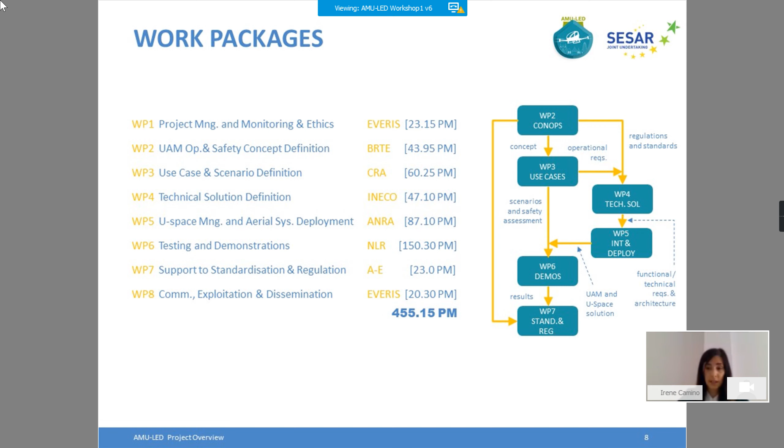Next, work package 4 implements the technical solution so that, along with the U-space architecture, integration and deployment of aerial systems can occur in work package 5. The flight test campaigns are handled then within work package 6, which has the largest effort of all work packages, as you can see. The results, together with the outcomes of work package 2, are then fed to work package 7, which is the support to standardization and regulation. One of the key activities is the dissemination and communication of the advances and findings of the project, which is organized within work package 8.

Moving on to the demonstrations, the flight test campaigns will accumulate more than 100 hours of flights. They are scheduled in 3 different locations and will be managed by different partners. The demonstrations are organized in such a way that the complexity is increasing as they take place.

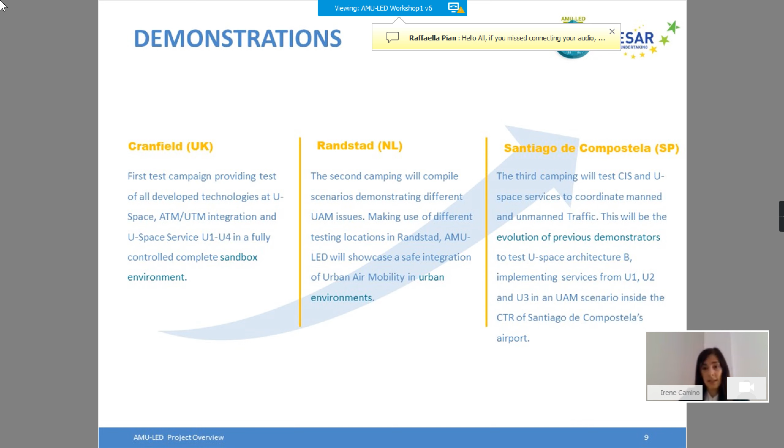The first one, which will be in the UK, in Cranfield, takes place in a fully controlled environment. The one in Randstad in the Netherlands will involve more factors, different UAM issues. And the one in Spain, in Santiago de Compostela, is planned to be performed near the airport, which is therefore more complex. There will be 2 air taxi providers, EHang and Tecnalia, flying the 3 locations, and also autonomous and conventional UAS.

Fixed wings and multicopters are expected to fly too. The 3 demonstrations are scheduled for the summer of 2022.

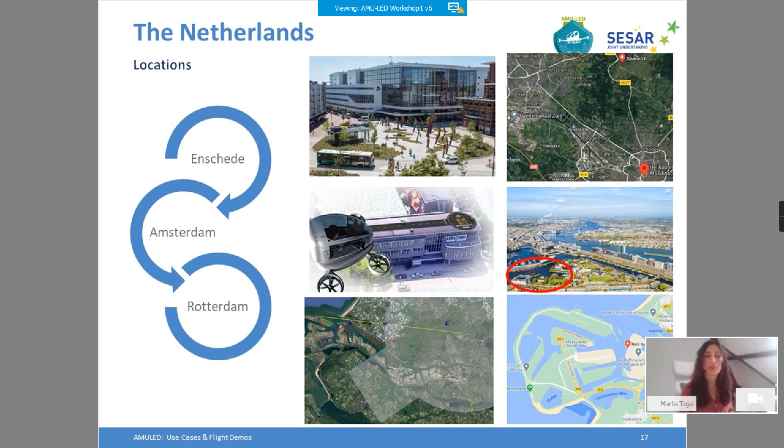The platforms that we're going to fly in the Netherlands are the EHang. We also have some drones from NLR, the autonomous drones from Cranfield, and we will also be flying with the trauma helicopter from ANWB.

So what we're going to demonstrate through these flights and in these sites is safe integration of manned aviation, and we'll also test engagement of drone versus drone, drone versus eVTOL, or drone versus manned aviation, the helicopter for instance. We'll also demonstrate safe prioritization procedures for medical drones, and we will have a test for the operational procedures and mechanisms for having interface with ATC.

We will have the deconfliction between two drones pre-flight and in-flight with U-space services. We will be flying above urban areas and above water, deploying the U1, U2, and U3 services, and we'll be performing the flights in liaison with an air traffic controller from a controlled airport.

And finally, the last demonstration will take place in Santiago de Compostela in Spain. This location is also embedded within the CTR of an airport, the Santiago de Compostela airport, which receives regular flights every day. The location for the demonstration is going to be in a suburban area within the city, so it's probably going to be class Z airspace.

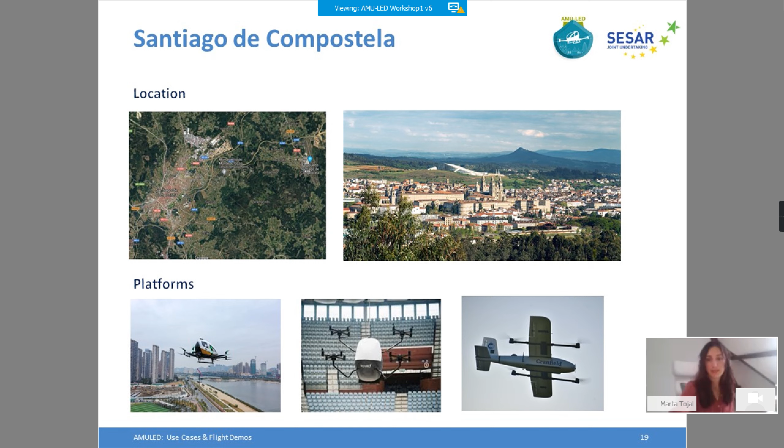So this is the cue for the next presenter. We'll be performing the flights in summer next year, as I said before, and we will be preparing everything in the meantime. So thanks, I will be giving the floor to Alejandro now, who is going to present the CONOPS.

Thank you, Marta. So after these nice introductions to the project and the flight demonstrations, we are about to start our CONOPS discussion. I'm going to do so following the structure or the topics that you can see.

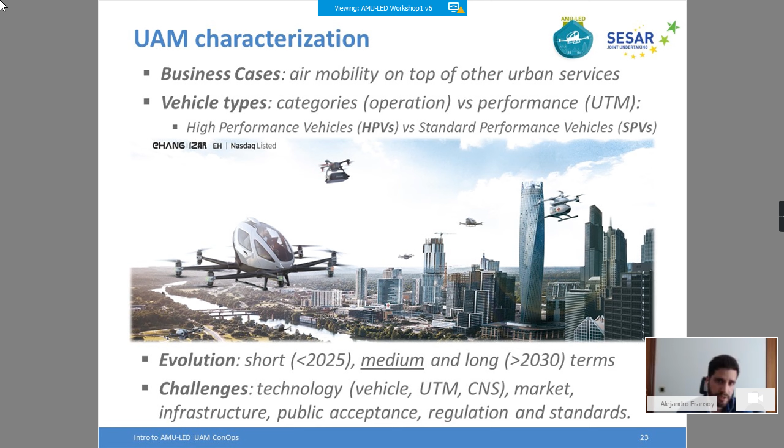Just my last slide. As I commented earlier, we try to respect as much as possible the roles and responsibilities and the services given in U-space regulation, but they obviously need to evolve somehow in order to incorporate urban air mobility. So still, we are proposing the same set of actors, but with extended responsibilities to cope with this traffic.

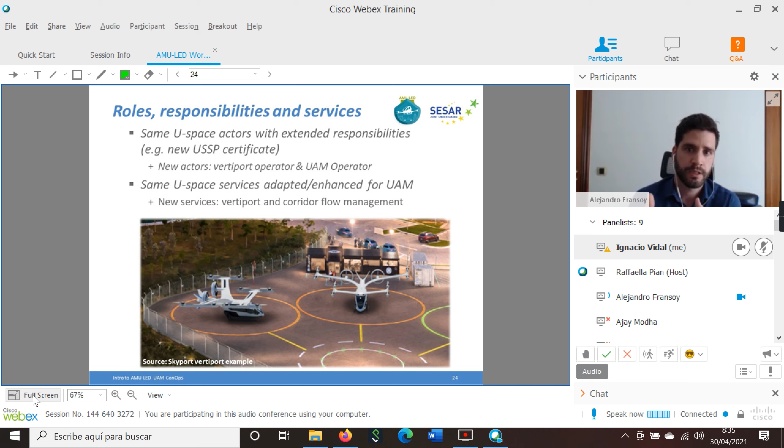So for instance, we can think that U-space service providers might need to obtain a new certificate to manage this high-performance traffic, providing customized services for them, for their operations planning, for their strategic and tactical deconfliction, to access vertiports and manage nominal operations.

Similarly, the Common Information Service, aeronautical information and airspace restrictions have been tailored for these high-performing vehicles, and the same applies to coordination mechanisms with ANSPs.

And even the national supervisory authority should establish a means to certify new UAM operators who will, in the end, hold an AOC, and should develop the acceptable means of compliance for vertiport certification and for granting licenses for pilots in command. So, as you can see, all actors will be affected in one way.

And on top of these changes to the existing actors, there will be new ones, such as the UAM operator itself and also the vertiport operator, who will be in charge of the ground operations, safety and security, boarding, charging or refueling, and more importantly, providing vertiport information, such as availability, to coordinate takeoff and landing procedures with the U-space service provider.

And in the same line of thought, and just to conclude, some services will need also adaptation to cope with this kind of traffic. For instance, I can think of the accuracy, latency, integrity, and the refresh rate of the tracking information could be more demanding, or the conformance monitoring thresholds for activating alerts could be different too.

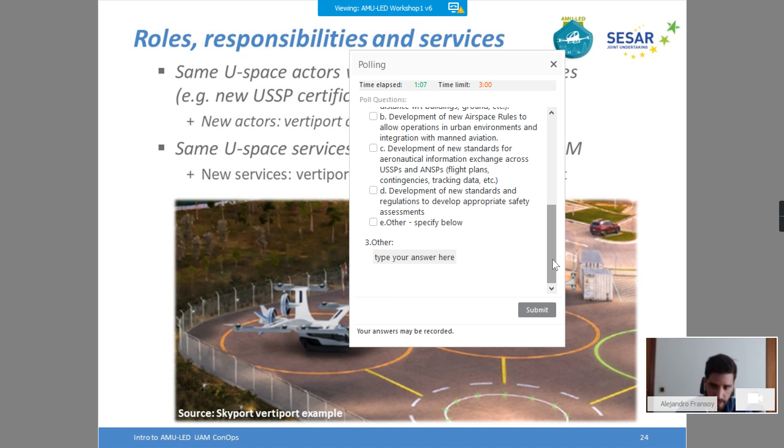I think Rafael is giving you about 3 minutes to complete the survey, and then we can comment on the results. So I'll just be quiet so you guys can read through it.

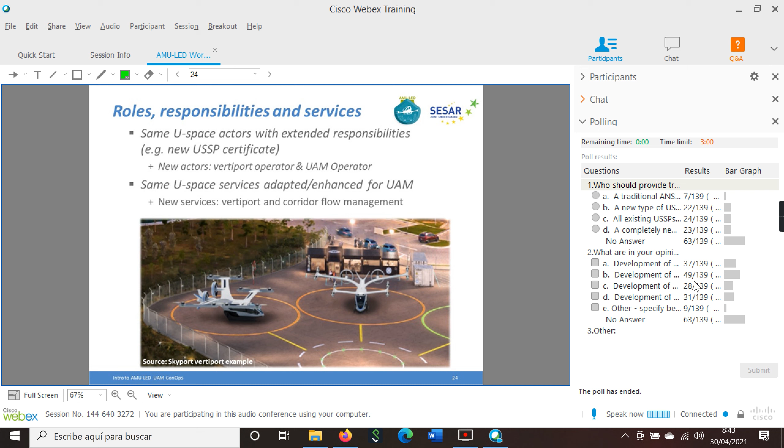Hello, good morning. My name is Victor Gordo, and as Alex has said, I'm going to talk about the proposed airspace structure in the AMU-LED CONOPS on behalf of my company, Ineco, a Spanish engineering company focused on transport infrastructures - railways, roads, airports, and air navigation. I am an aeronautical engineer, I've been working in air navigation for more than 20 years, and in the last 5 years I've been involved in several U-space projects like Terra, Impetus, Domus, and now Dacus and AMU-LED.

Let me show you the airspace structure we have proposed in this project and the reasons for that. First of all, to introduce this airspace structure, we need to know that our main challenge is to provide a safe and effective integration of UAM operations. To do that, we need to be able to provide safe separation and conflict avoidance.

We have three main challenges. The first is the separation of drones with regard to manned aviation, specifically high performance vehicles and VFR aviation. This is because general aviation commonly lacks any kind of transponder or conspicuity means, or not all of them have them - this is a real problem for integration with unmanned vehicles. In general, with manned aviation there are different altitude references: manned aviation has traditionally used barometric altitude, whereas drones use GNSS altitude, and this also difficults the integration of these different traffics.

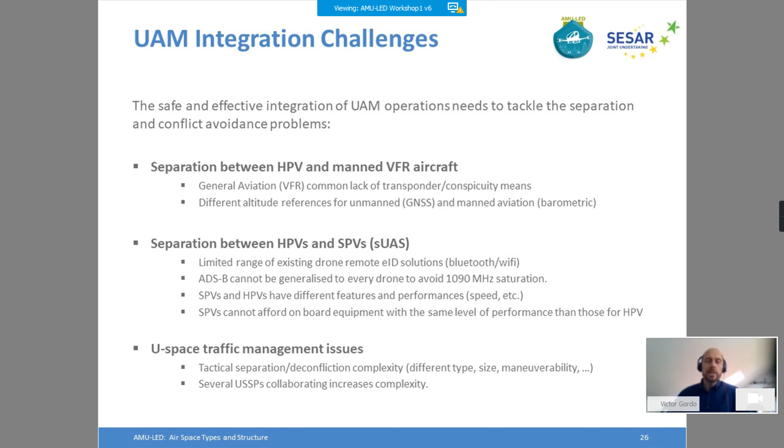In drones, we have different types: fixed wing, multi-rotors, hybrid. We have different sizes, different maneuverability, and drones flying apparently to every place. So the tactical separation is much more complex than in manned aviation. Also, the environment is much more complex, because in traditional aviation we have only one ATM provider in each volume of airspace, and here we are going to have several U-space service providers collaborating, which increases the complexity.

So with all of that in mind, we have proposed an airspace structure which tries to handle all this problem and provide a compromise solution. We can see here on top of the picture above, manned aviation. Then we have two layers: the high performance layer and the standard performance layer, mainly devoted to high performance vehicles and small drones. Let me explain the concept.

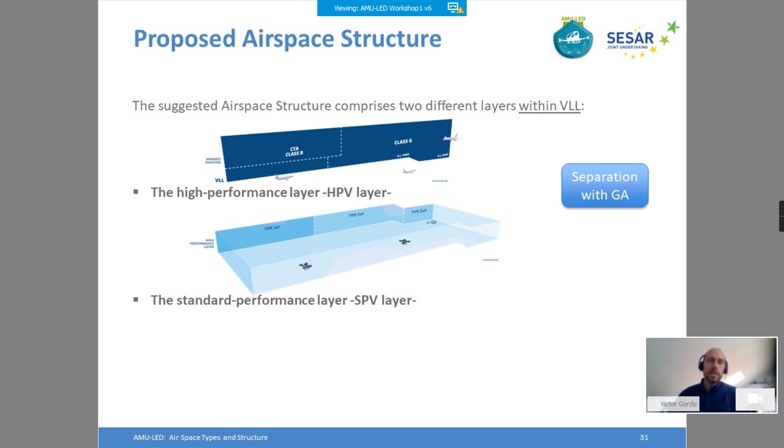As said, the suggested airspace structure has two different layers within very low level. Being within very low level, the high performance vehicle layer will be separated from manned aviation, solving the problem of separation with general aviation without conspicuity, as well as the problems of different altitude references. Then the high performance vehicle layer and the standard performance vehicle layer will provide separation of large drones and air taxis from small drones, which are the most common ones nowadays. This provides separation between these two types of vehicles.

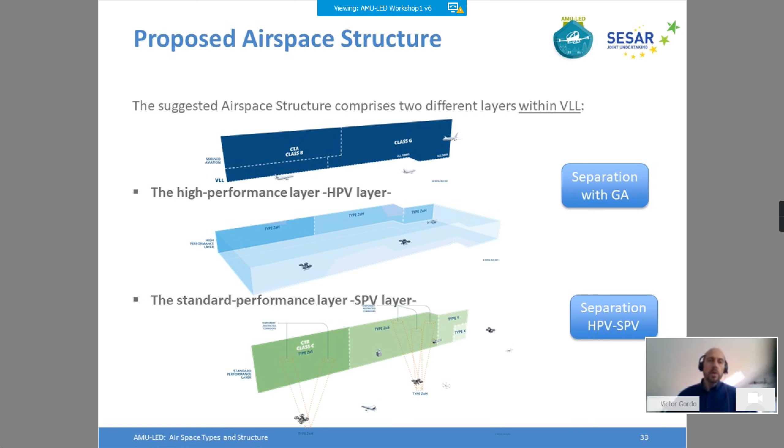We consider that this solution is a feasible way, in the short to mid term, of providing a safe environment of operation for all these kinds of vehicles, without doing very dramatic changes to the current way of proceeding in manned aviation, and also allowing the continuing operation of small drones.

But of course, there is one problem remaining: the high performance vehicle layer is okay when they are in cruise phase, but they have to land and take off. For that, we have considered that vertiports will be located in Type Z airspace volumes. And when a high performance vehicle pretends to take off or land, they will activate some predefined dynamic corridors connecting these vertiports with the high performance layers.

Why is the reason to not have this corridor activated all the time? Well, because otherwise we would be restricting too much airspace for the small drones. So the idea is to use these volumes of airspace, or to protect them, only when required to be protected, not the whole time. This is the idea behind it.

And this way we will assure the separation between the high performance vehicle and standard performance vehicle, even in the standard performance layer on the ground, let's say, where the vertiports will be located.

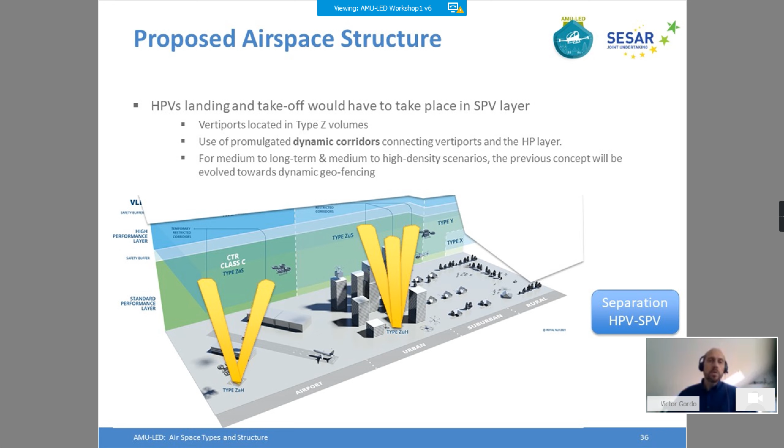So what will be the general way of working of these vertiports? They will be located in U-space airspace, attending to CORUS definition. So when a high performance vehicle wants to take off or land, it will request this operation from the USSP, and the USSP will activate the corridor. The standard performance operation in the corridor will be cancelled, a geofence will be provided, and all vehicles over the area will be required to change their position and go out of this corridor, or land if required.

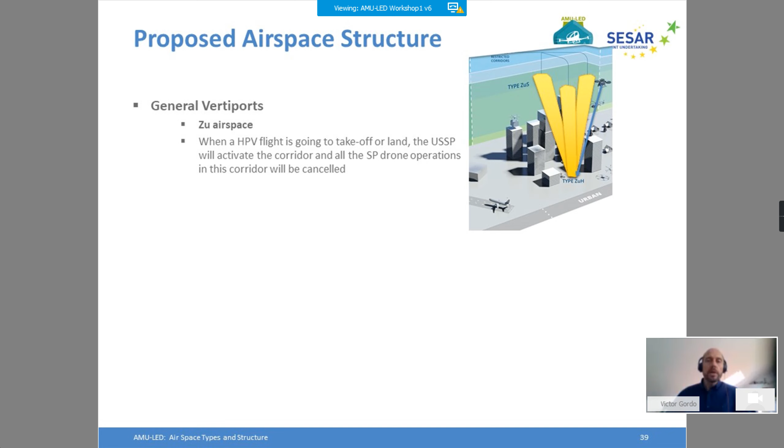But what happens when a corridor is in a CTR? When we have these vertiports in a CTR, we have a different problem: the airspace is Za airspace, again attending to CORUS definition. So in this case, the USSP cannot activate the dynamic corridor by itself. The process will be the following: again, the operator will ask the USSP to activate the corridor to land or take off.

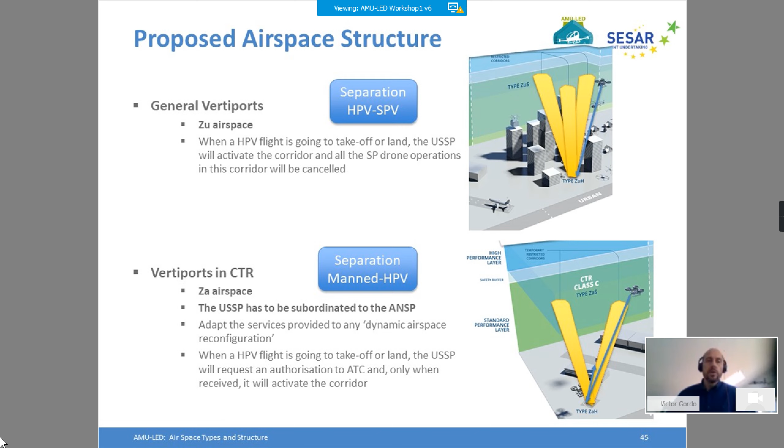Then the USSP will ask for permission, for approval, to the air navigation service provider responsible for that volume of airspace. In case there is a dynamic airspace reconfiguration, they will not allow this activation, or they will allow it if no other manned aircraft is operating at the moment. Then when the airspace is free from manned aviation, the ATM provider will allow the USSP to activate the corridors, and the operation of UAM will take place. And then we assure separation not only of a high performance vehicle from a standard performance vehicle, but also from manned aviation.

The last point I want to mention is what happens with these large air taxis which are thought to fly with a very high flight envelope, higher cruise speed, cruise height, larger speed and range. Of course, they cannot fly at very low level all the time, because they have a greater visual and noise impact, and a higher flight envelope. They have to fly, for example, at 10,000 feet.

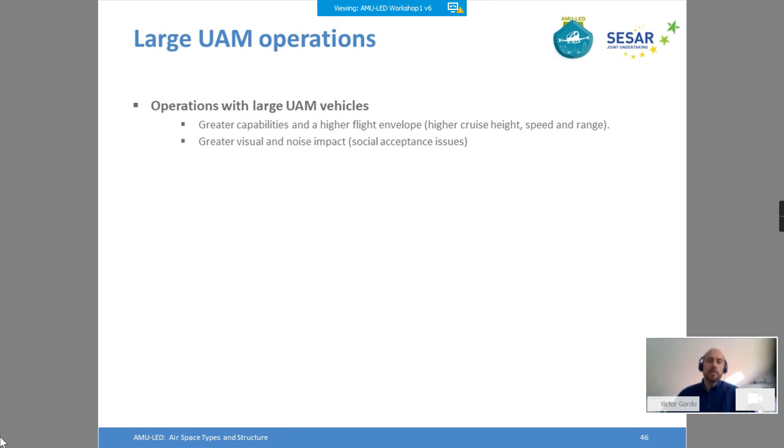What do we plan to do with them? Well, for cruise activities, they will have to fly above very low level. So our idea is, in the short term, to provide a limited number of corridors for this high performance vehicle. But considering that if you are going to fly from the airport to the city, you are not going to jump to 10,000 feet. This happens when you are going to fly from one city to another, or from one place to another, at 100 kilometers at least. If you are going to fly a few kilometers, you don't have to fly to 10,000 feet and then go down again. It doesn't make sense.

So in case you want to fly a larger distance, we can set a number of limited corridors, and the word limited is very important, because if we establish an unlimited number of corridors, in fact what we are penalizing is manned aviation in general, extending very low level to 10,000 feet somehow. In the long term, perhaps with flexible use of airspace, all high performance vehicle and VFR manned aviation can operate in a non-segregated environment, provided that in the long term all VFR flights will be properly equipped and we can assure separation.

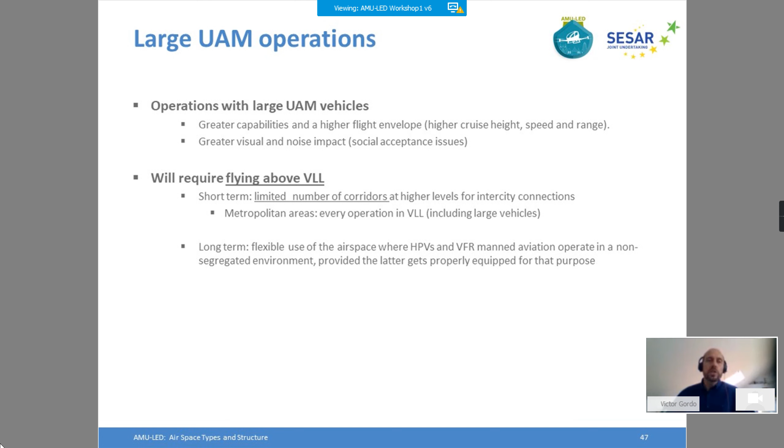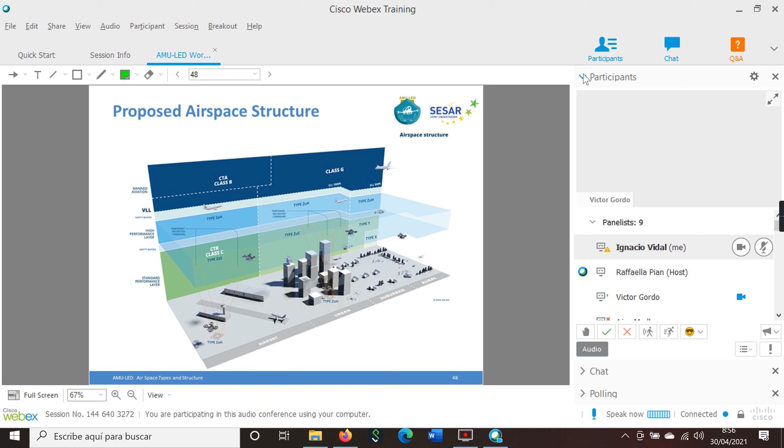So just to end, let me recap. We have three different layers: above VLL, traditional manned aviation; the high performance layer, which will be a type ZuS airspace with high performance vehicles, where manned aviation could enter provided they are equipped with the required onboard equipment, conspicuity means, whatever. And on the ground, a standard performance vehicle layer closer to the ground, where they are not so noisy and can fly closer to the ground at lower height and speed, not interacting with the higher performance vehicle, except at the time they want to take off or land. So we will have, in this case, dynamic corridors around vertiports.

And the last point before closing my intervention is that, of course, we assume that between VLL and manned aviation there will have to be some kind of safety buffer, which is yet to be defined. It's not yet in our concept, but we have to define it. In a lot of states currently, drone operations can only happen up to 400 feet, not 500 feet. So yes, we assume that a safety buffer will be required, and also a small safety buffer between the high performance layer and the standard performance layer.

And well, this is in summary what we have planned for the airspace structure. We know that it is perhaps a challenging airspace structure, but we think that it allows a different way of proceeding without a large impact on manned aviation in the short term.

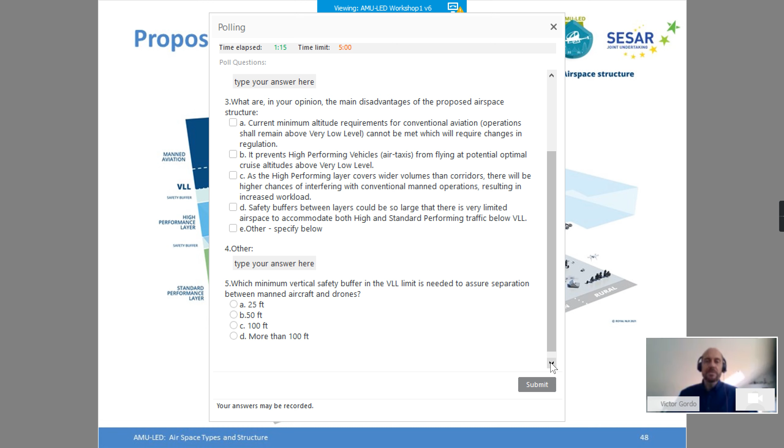So I think the poll is closed, isn't it, Raffaella? Can we see the results? The results are visible in just a few seconds. Thank you. Okay, ready for you. Okay, thank you very much. Very interesting results indeed.

We have 40 people saying that the main advantages of the proposed airspace structure relate to providing separation with manned aviation without requiring any airspace change, and also the dynamic activation of protection volumes around the vertiports, which 35 people consider very interesting.

And also allowing more flexible UAM routes.

With regard to the disadvantages, the most selected option is the problem with safety buffers, which we also consider could be something to address. But also the high performance layers cover wider volumes than corridors, preventing air taxis from their optimal cruise height. Finally, we have different replies regarding the minimum height, but most consider that at least 100 feet will be required, which could be a constraint.

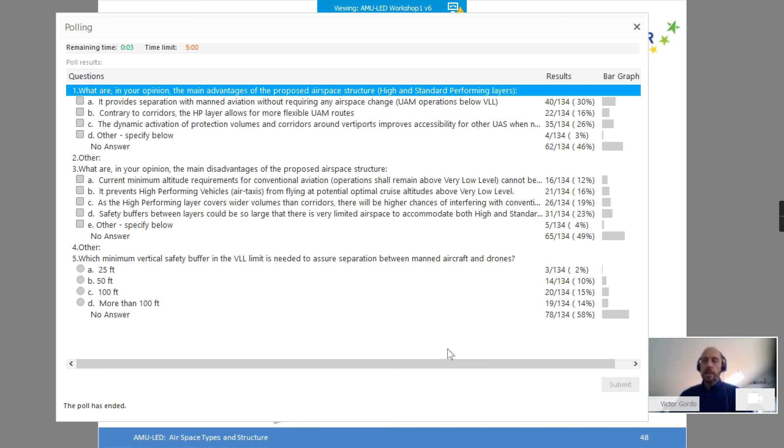Hello Victor, thank you very much. So this is Gokhan Inalhan, BAE Systems Chair, Professor of Autonomous Systems and Artificial Intelligence here at Cranfield University. Specifically, what we're going to touch on today is the separation and conflict management that we envision under the AMU-LED project.

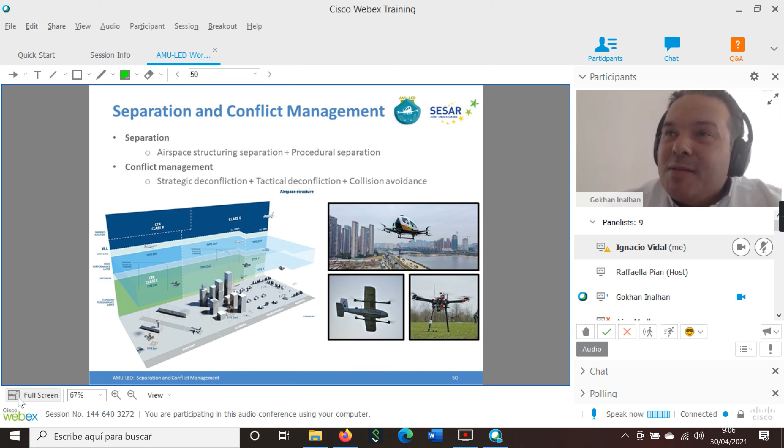This whole composite CSM concept is obviously about separation, and the way we see it is through these layers, whether on the high performance vehicle side or the standard performance vehicle side, and this airspace structuring that we have, including type X, Y, Z, and granularities between Z, leading into procedures for procedural separation. That's what we see as the main separation guideline.

And above that, integrated or interwoven into that, is this notion of conflict management. This conflict management, as you probably all know, happens at different time scales, starting from the strategic level, going into tactical, and then into real-time situations where you move into collision avoidance, whether detect and avoid or see and avoid.

One important aspect is that how you do this and the granularity associated with it is dependent on the types of vehicles. I'll be very open, it's a learning game for us too, because the notion you get out of urban air mobility or advanced air mobility, whether standard performance unmanned air vehicle or higher performance aircraft, which could indeed be autonomous as well, not only manned.

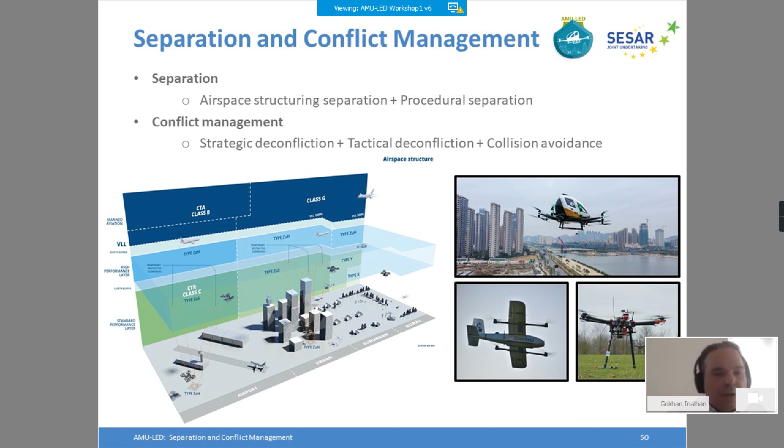And manned does not necessarily mean it's not autonomous, so the level of autonomy is interesting here. It adds different flavors to all of this question, one we cannot answer in its full entirety, but we're taking it slice by slice, piece by piece. So this is the first cut we have towards this.

Moving into it, it's important to identify the actors involved, whether competent authorities, USSPs, the Common Information System and its support, or operators, pilot in command, and in control, and the activities they undertake as part of separation and conflict management. Within this integrated structure, we started with airspace structuring, but we're also looking at operational planning, ground level surveillance, geographical containment, and methods for detect and avoid.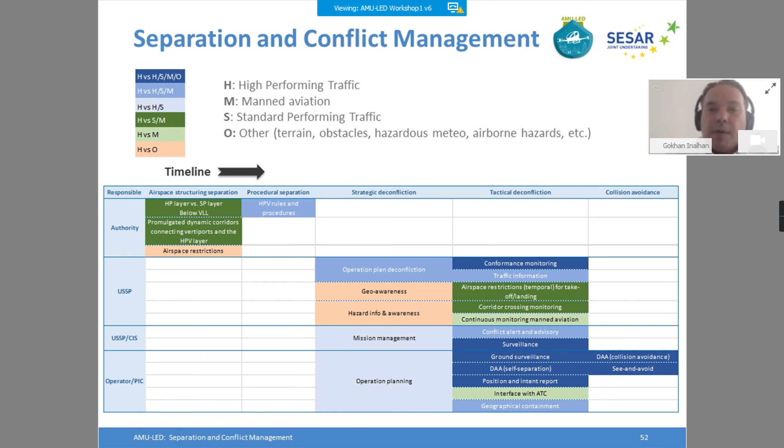The fundamental question becomes, with such a complex scenario, how do you test algorithms? How do you test methods and so on and so forth? This is one of the key challenges, and we were aware of this from day one while preparing the proposal itself, the AMU-LED proposal.

The issue was to sit down and understand both the methodologies, from an airspace structuring level, and also the actual implementation of the procedures, going all the way down to detect and avoid or see and avoid. We would need to test this out and understand it in an exhaustive sense.

This is one of the efforts we are currently focused on: doing this within a simulated environment which can embed both manned flights, unmanned flights, and vertical takeoff and landing vehicles, whether manned or autonomous, embedded into specific simulation scenarios. You're seeing here a highlight of this whole modular structure that we are progressively building within Cranfield University to look at separation and conflict management.

One of the interesting features of this is the inherent capability we're building to do co-simulation and co-testing with live flight tests. So the extra number of vehicles, and extra number of risks from having a large volume of vehicles, is to some degree evaded by having virtual elements within our flight testing scenarios.

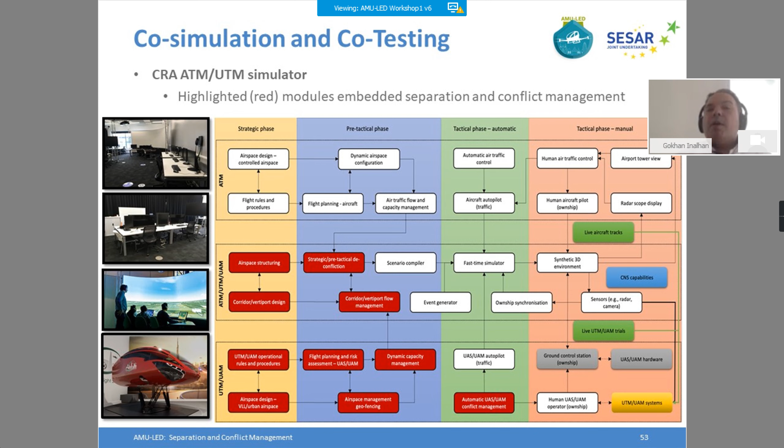Here, of course, the immediate issue that comes in is the nominal cases. You also see the off-nominal cases, but what's happening at the contingency management side - meaning off-nominal cases relate to contingency management - and there's a further level of that, which is emergency management in emergency situations.

What we're getting, especially with regards to these urban environments, including unmanned and manned air vehicles, some of which might have autonomous or semi-autonomous features, is different notions of failures. These could be standard CNS failures, or environmental effects from operating with aerodynamic blanketing effects, the effects from skyscrapers and other buildings, adverse weather effects which can be local phenomena, and electromagnetic interferences.

These could be distributed across the whole urban operations you might have. We could also have human and operational events, including pilot in command distractions, medical issues, and real-time obstacle collisions that might happen. You might see all of these appearing because of new construction - a new crane comes into the scenario and it changes things.

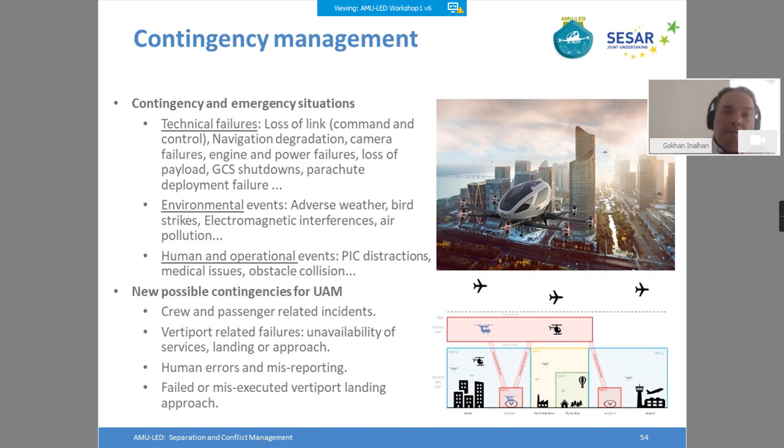One of the things you see is this emergency landing situation, where you're looking at it both at a strategic time frame, a tactical time frame, and a real-time time frame - identifying locations to land: predetermined, not available, or real-time determined, updating your geographical information systems, and so on. It's part of a whole cycle of events you're seeing here.

We see this as a very key enabling method in both social acceptability and as part of safe operations, as a case of safety cases, to be able to do these types of things.

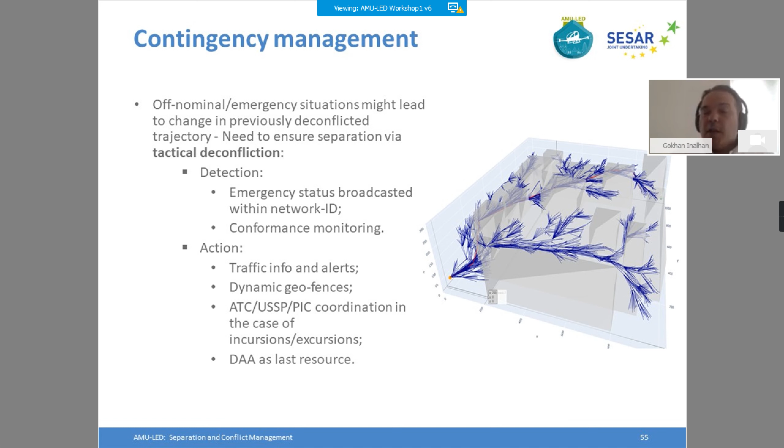And we are working towards implementing these within both simulation first, and then to be able to do it in the first flight test as a part of the technology development aspects. Which takes us into various research themes and the idea. Within AMU-LED, a very large demonstration project, at the end of the day, success is driven by the need to sit down and demonstrate these capabilities, the basic fundamental ideas that we're developing.

But there are also key aspects that come from the structuring of the business. Having multiple USSPs on the same airspace, how do we do capacity management? Do we do it in a centralized or decentralized fashion? Once that comes in, how are the SCM duties distributed, where you have multiple operators and multiple USSPs at the same time? We're looking at different methods and approaches, especially AI-driven methodologies, to handle different architectural schemes, whether centralized or decentralized, for dynamic capacity management and SCM.

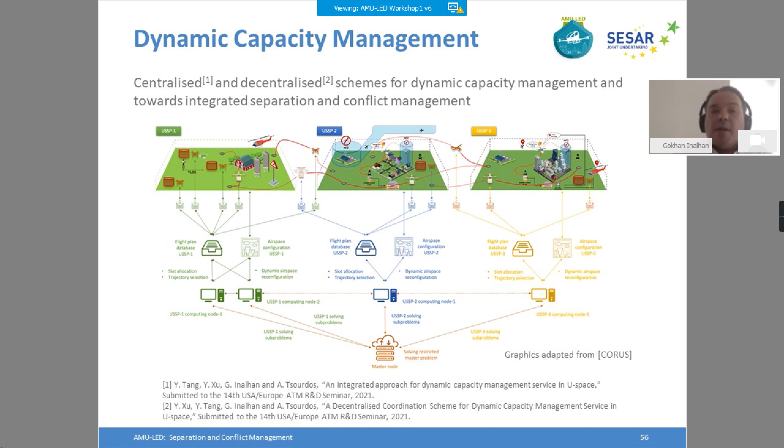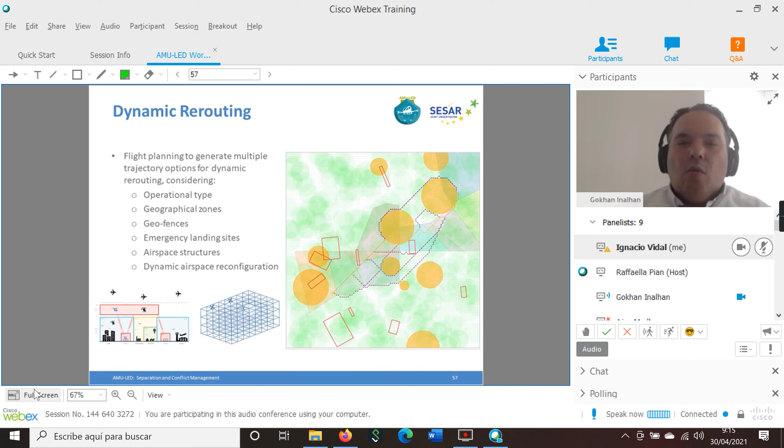Also, one of the issues that comes in is the nature of the business, based on the operations you have, geographical zone, geofences that appear, emergency landing sites, airspace structures, and dynamic airspace configurations. These are all parts of the current research we're trying to embed into at least the simulated part of the experiments we are going to have.

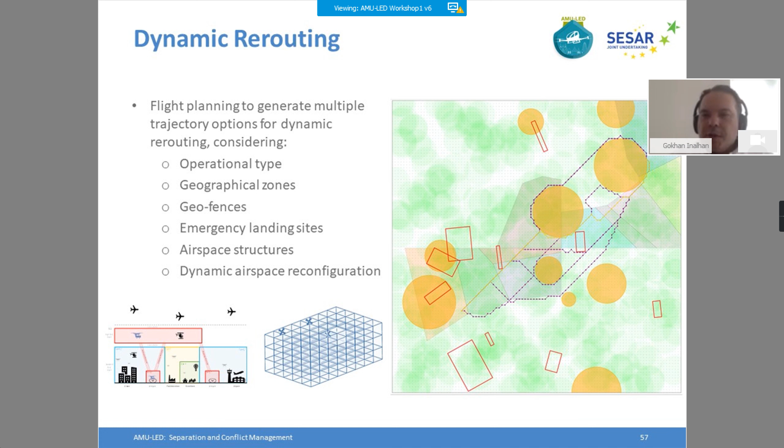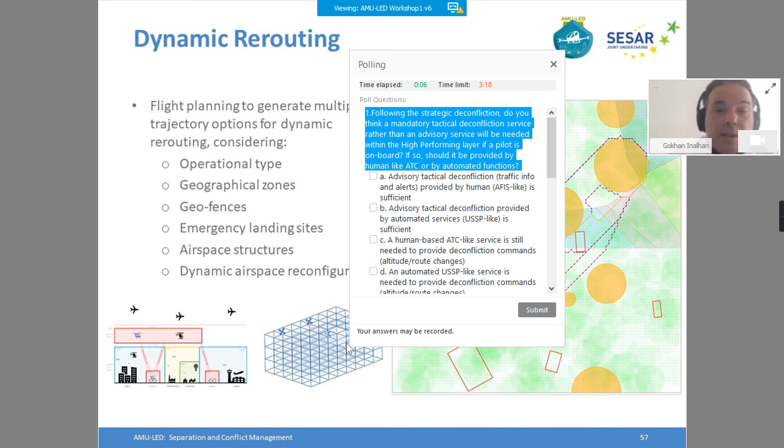Just a brief insight. The first one is with regards to strategic deconfliction: do you think a mandatory tactical deconfliction service, rather than an advisory service, will be needed, especially within the high performing layer if a pilot is on board? So one of them is that. The second one is, what is your opinion on the most important aspects that should be covered when developing standard contingency procedures?

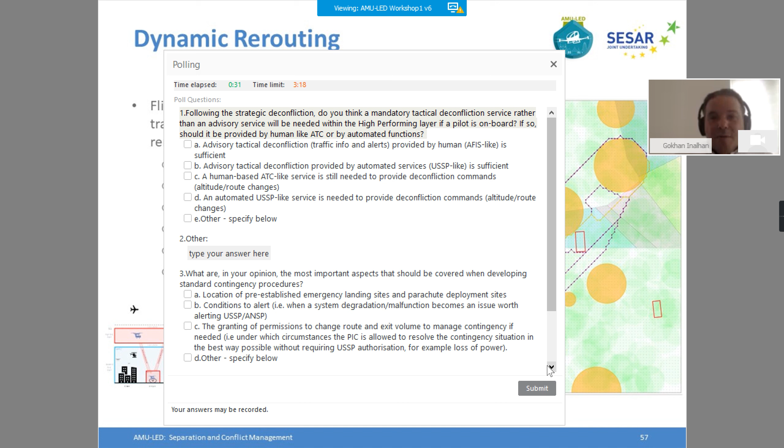Okay, well, let me just open this up, just to be on the safe side. So it's actually not surprising. With regards to strategic deconfliction, we're seeing it evenly divided, but the focus is more geared towards an automated USSP-like service to still provide a deconfliction command, such as altitude, route, and so on. That's interesting, to have an automated USSP-like service even if a pilot is on board.

And the second one is the important aspects. It's actually a little bit evenly divided. We're looking at location of pre-established emergency landing sites, condition alerts, and the permission of granting permissions to change route and exit volumes. Very nice. Again, thank you very much to all the participants for the feedback on this one.

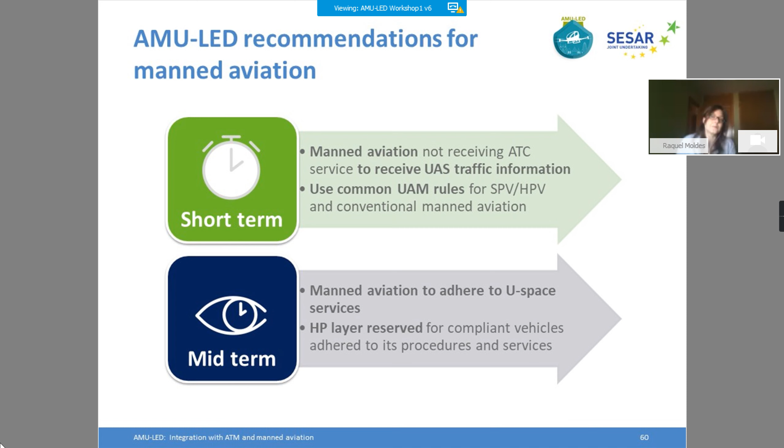Another aspect to take into account is that many urban environments are highly within the CTR of the airports. To this end, we have taken the recommendation from the ACI concept of operations, where they propose 3 different drone fly zones depending on the risk of drone flights for the other airspace users. Based on this approach, and to streamline operations in urban environments highly affected by the airport CTR, we are proposing 3 different UAS operation categories: high-risk operations, which will need coordination with ATC and for which collaborative interface with ATC should be mandatory.

Mid-risk operations, where ATC should be informed that an operation is taking place, but they don't require ATC approval. And low-risk operations, which maintain a necessary distance to ensure safety of manned aviation operations, so they do not require any coordination with ATC.

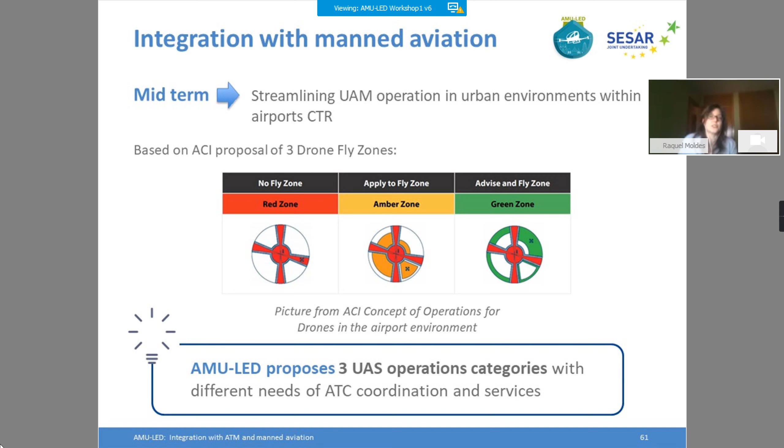Finally, as already introduced by Victor, there might be vertiports within the CTRs of the airport, or even inside the airport. To this end, we are proposing 2 different ways to manage the corridors connecting the vertiport to the high performance layer. When these vertiports are far enough from the airport to ensure safety of operations, they could be defined as U-space airspace, as they are considered low-risk operations.

And for those which do not meet this condition, then the ATS provider of the airport should provide the activation and deactivation of these corridors, managing them dynamically.

Now we have prepared also some questions and polls to check your view of these proposals.

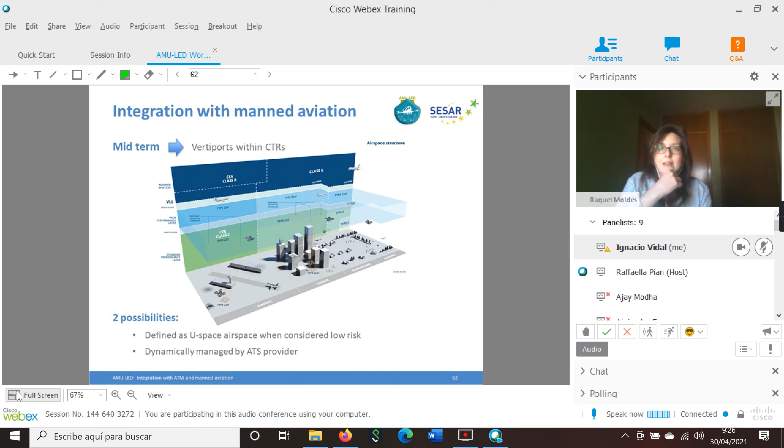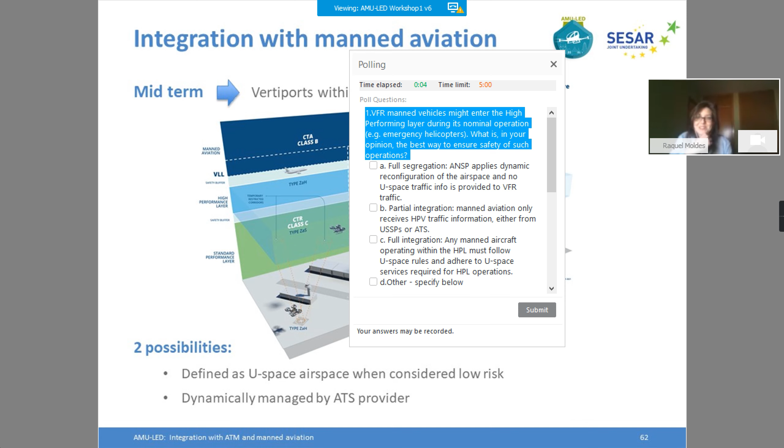The first one makes reference to the recommendations of the high performance layer, and the second one to the additional recommendations to enhance the rules already established by the U-Space Regulatory Framework.

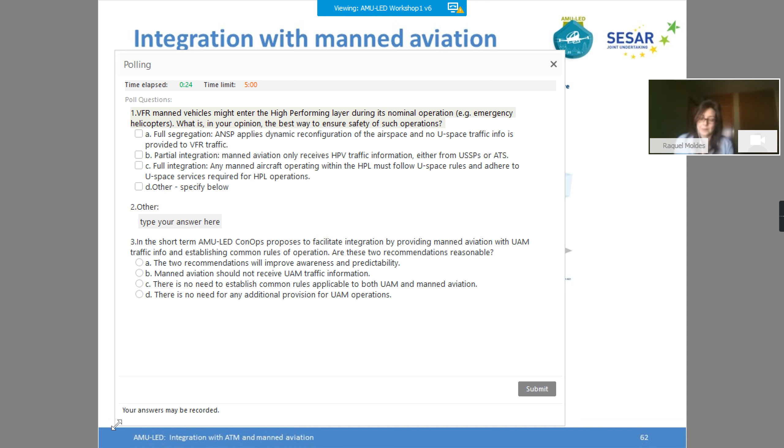I see most of you advocate for full integration. That's good, it's what AMU-LED CONOPS are proposing, so we are aligned. Most of you have deemed that the two recommendations will improve the awareness and predictability, so it seems that our proposal from CONOPS has more or less covered your worries for UAM. So we can close this section of the presentation.

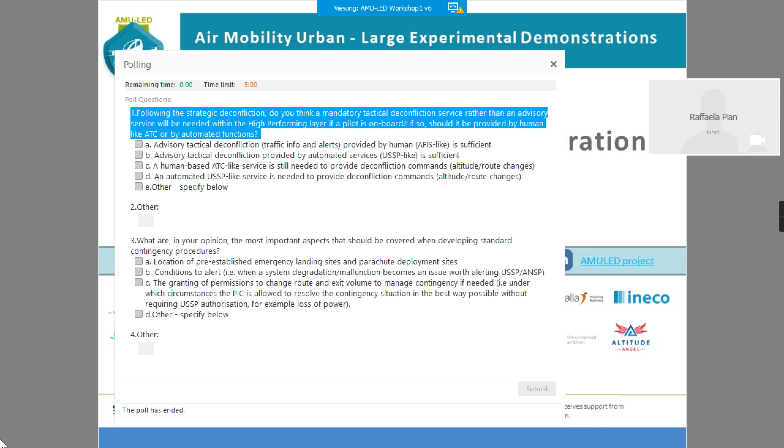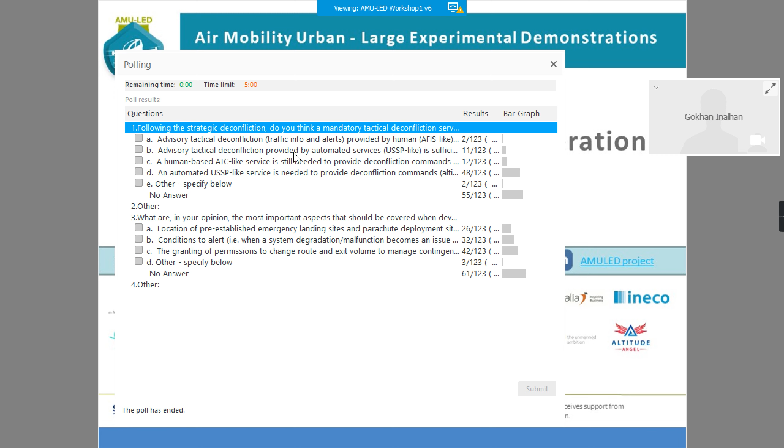Okay, just a second. Let's open this up. Just kind of understand the results one more time. So yeah.

Okay, the poll changed, the results did not change, so they're increasing the numbers. The first one, if I'm reading this right, the notion is more of an automated USSP-like service for deconfliction, even for high performing layer vehicles with a human pilot on board. The main thought process is towards such an automated USSP-like service.

With regards to the most important aspects when developing standard contingency procedures, it was kind of evenly divided. If you ask me, the thing that jumps up is the granting of permission to change route and exit volume to manage contingency if needed. But you also see quite a bit of opinion on location of pre-established emergency landing sites and parachute deployment sites and conditions to alert - it's quite evenly divided.

I should say I'm a little surprised, especially for the high performing layer with a pilot on board, seeing an automated USSP-like service for deconfliction commands - that's really interesting to note. So thank you for everyone who took part in the polling. Thank you.

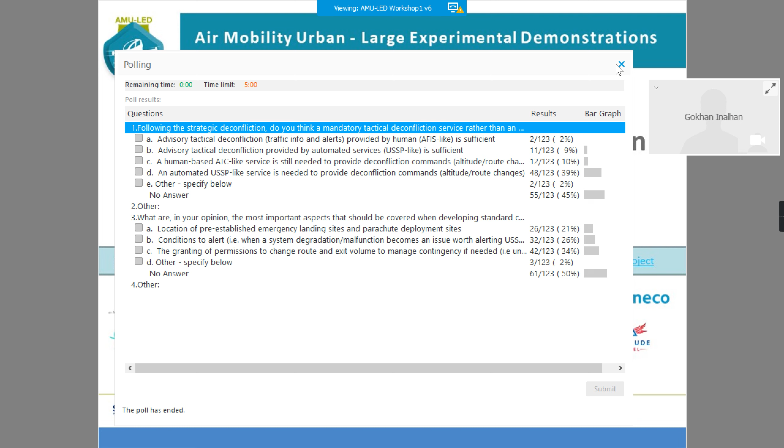Thank you, Gökhan. I think there is time left, Rafaela, for another poll. This time it's regarding a topic that also created some debate internally in the project, which is the management of vertiports. There are 3 questions there for you to have a look at and provide your views on.

Thank you, Rafaela, for launching it. We have 5 minutes to complete the survey, and then we will move straight away to the questions and answers.

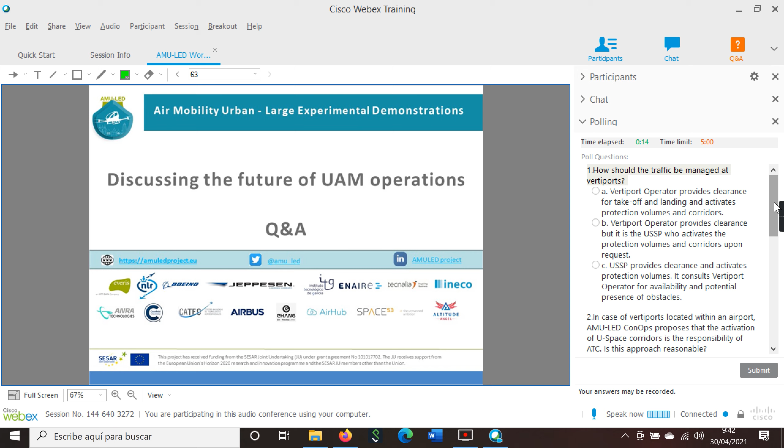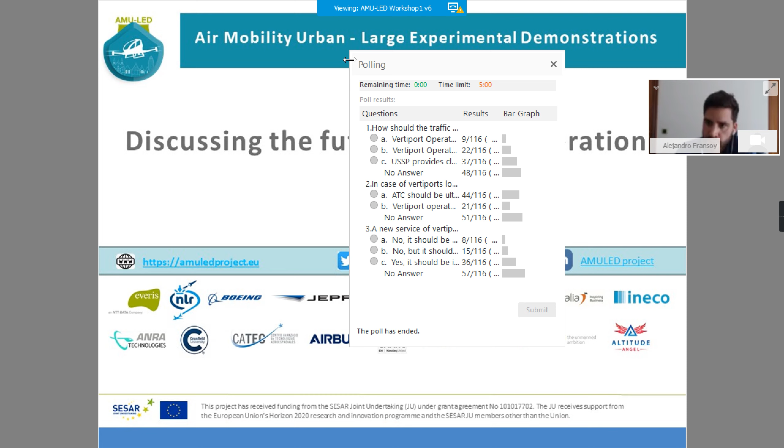Alex, results are ready. Okay, thank you, Rafaela. I can see those. I can move the panel, extend it a bit further, or I can just remember the question.

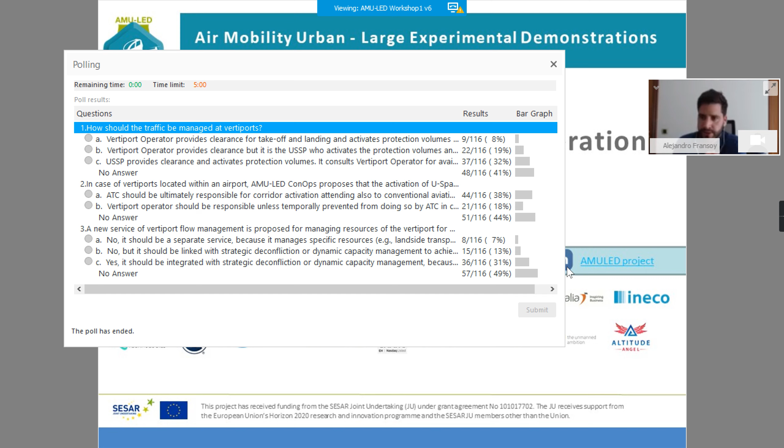The first one had to do with the management of the vertiports, and the winner seems to be that it is the USSP - the U-space service provider - who provides clearance, which is obvious as well. It's a good understanding that we were sharing here internally. But it has to consult the vertiport operator for the availability of the vertiport and the potential presence of obstacles. This seems to be the approach we were looking for in our ConOps as well.

There were other ways of looking into this in literature that we found, like it could be the vertiport operator itself who could provide clearance, but we are also in favor of option C as you guys are suggesting here.

What happens if the vertiport is within an airport environment? Most of you have gone for the first option, which is that ATC should be ultimately responsible for corridor activation, attending of course to the demands from conventional aviation. That is one of the proposals we are including in the ConOps as well. So it's good to see that you're in line with us.

Lastly, regarding this service for vertiport management, whether it should be integrated or not, it also seems to go for the last option, which is indeed making it an input for the strategic deconfliction and dynamic capacity management. So it's good to see we're all aligned.

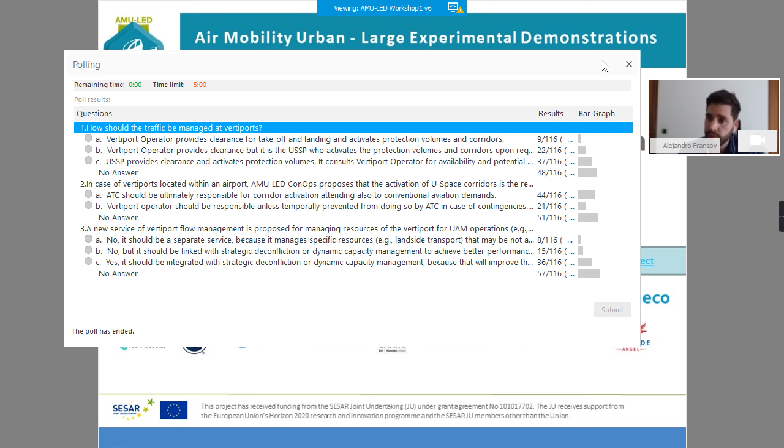So I'd like to start with Marta. There was one question from Ansgar, which I put in the prioritized panel, regarding the challenges on vertiports. Can you see that? Do you want me to read it to you? I see it - maybe I'll read it first so that everyone knows what we're referring to.

The question is: I consider one of the key challenges to be the availability of full-service vertiports. Finding spaces for them in congested urban centers will be a challenge and thus expensive. Have you factored the infrastructure costs into the business cases?

So we already replied to this question, but it's a very interesting question, so we're going to elaborate a little bit further.

Vertiports are a challenge of their own. You have to look at the optimization of their location within the city, the energy requirements, and even the design of the vertiport so that it's embedded within the landscape of the city.

These are things that have to be looked at and are definitely important. But in AMU-LED, we are more focused on the regulatory, technical, and airspace aspects that are needed for enabling urban air mobility through U-space. So when looking at the business cases we mentioned before, we use them more as part of the storytelling of our demonstrations, because our demonstrations are mainly going to demonstrate the technical aspects of the CNS systems, the airspace structuring, these kind of things for our CONOPS.